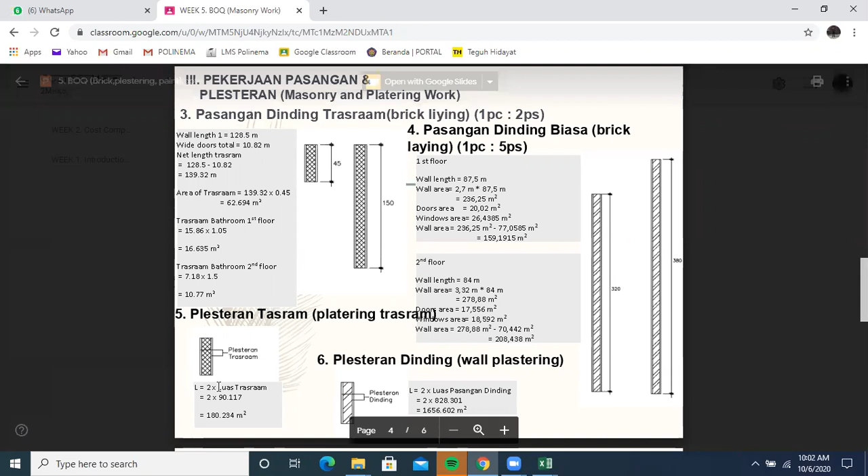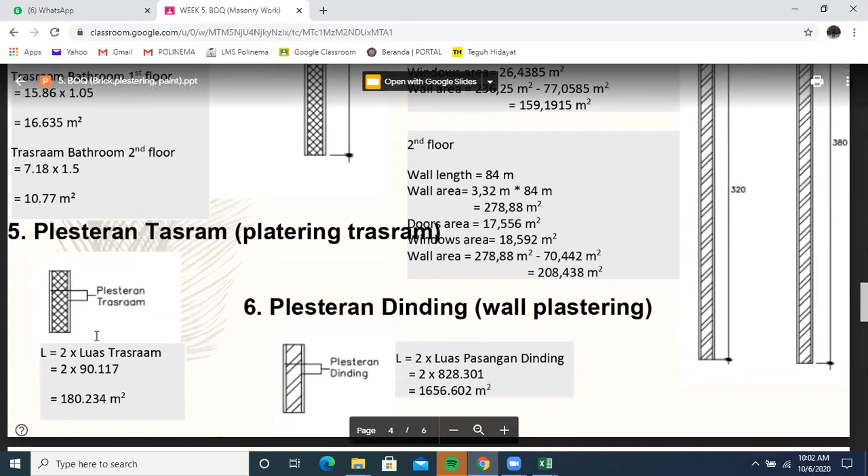Okay. After you get the number of the area for the trasram wall, you just have to multiply the area of the trasram by 2. Why should you multiply by 2? Because basically, if you take a look, the drawing of plastering is covering the flat surface of the wall between the right and left section in this section, right? So you just have to calculate the area of trasram multiplied by 2.

Okay. So after that kind of understanding, you just have to do the plastering. For example, I'm doing the plastering for... oh, I'm sorry. Okay, I will put another calculation. Okay, plastering for trasram. Sorry.

One PC compared with 3 sand. Okay, I get the number over here for bricklaying. Enter, and you just have to multiply by 2, and then you get the number, okay, like this, in square meters.

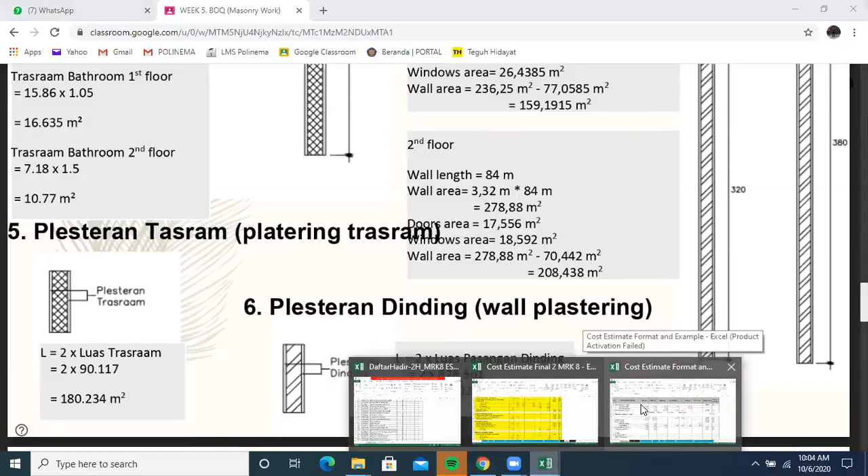Okay. You have to do the same thing for the normal plastering, the regular plaster. The composition is 1 compared with 6. So what you have to do, if you want to calculate the plastering, okay, I'm sorry if the Excel is so messy. Okay, I get number 4, plastering. Okay, 1 PC compared with, for example, 6 sand.

Okay, I just have to get the area from the bricklaying, the normal bricklaying over here. 191 square meters. And I do the same thing. I just multiply by 2. And I get the calculation of 383 square meters.

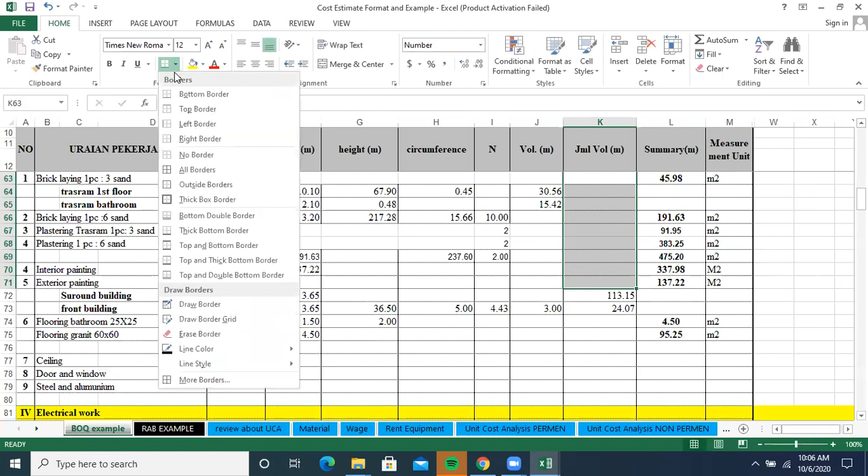Okay, after you calculate the area of the plastering, you also have to calculate the area for painting. Okay. For painting, basically the area is almost the same as the plastering. Now, interior painting. Okay. For interior painting, let me open the floor plan first.

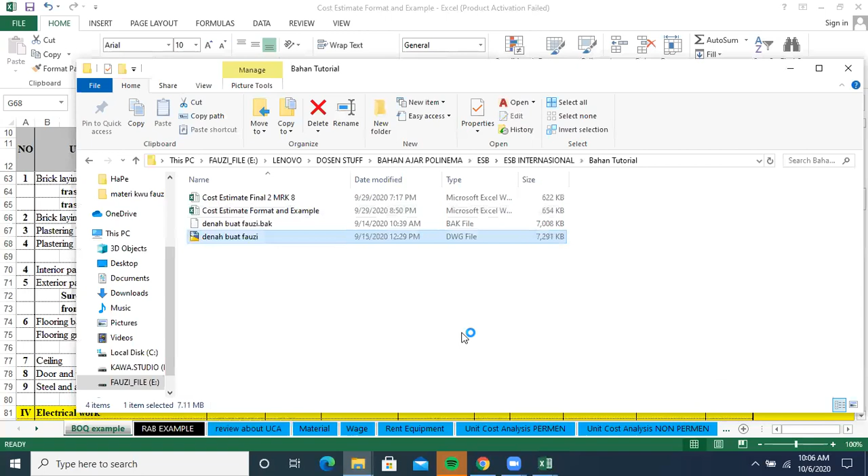Oh yes, if you have a problem with your drawing, you can share your problem in the Zoom meeting. Does anyone have a problem with their drawing? Yes, sir. I have a problem with my drawing. Okay, Abdul Rahman. Actually, in my drawing, I don't have a trasram. You don't have a trasram? Yes. Your drawing only has the normal wall, 1:6. Do you have the drawing on your laptop? Perhaps you can share it with us so we will understand the problem. Okay, let me open it. It will take some minutes.

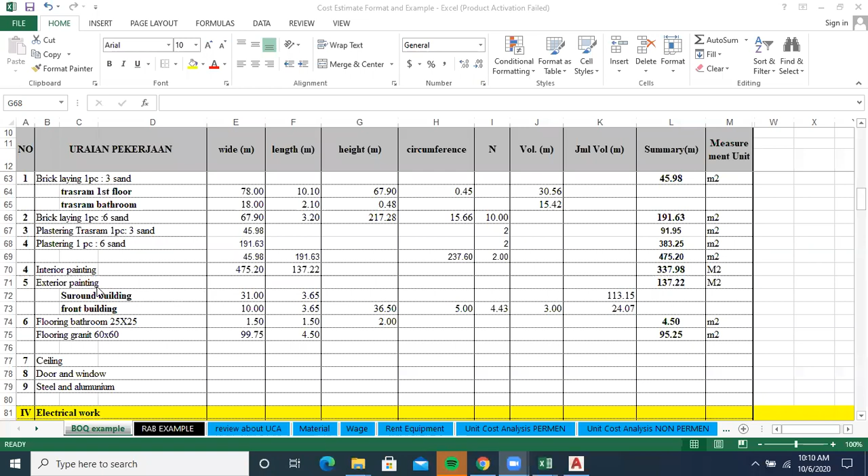Interior painting and exterior painting. Okay, basically what is the actual difference between interior painting and exterior painting? The interior paint material is used only for the rooms inside the building. But the difference is the exterior has a paint composition that is able to protect from the sun, sunlight. Okay, so you have to differentiate between the area of the interior painting and the exterior painting.

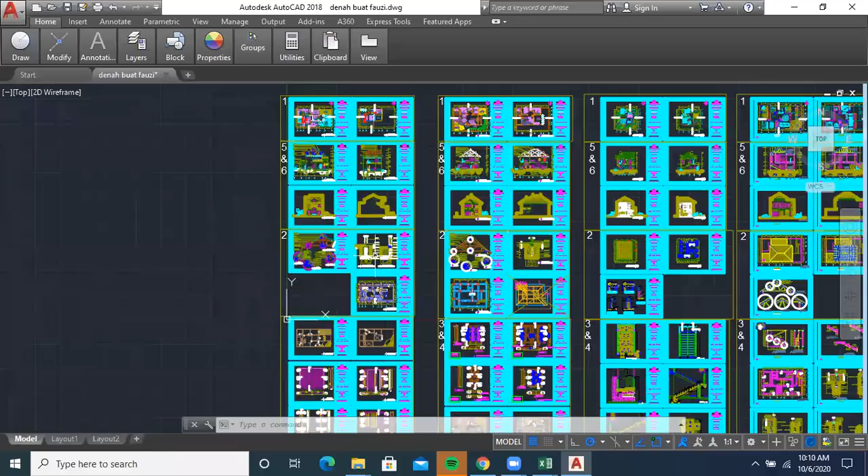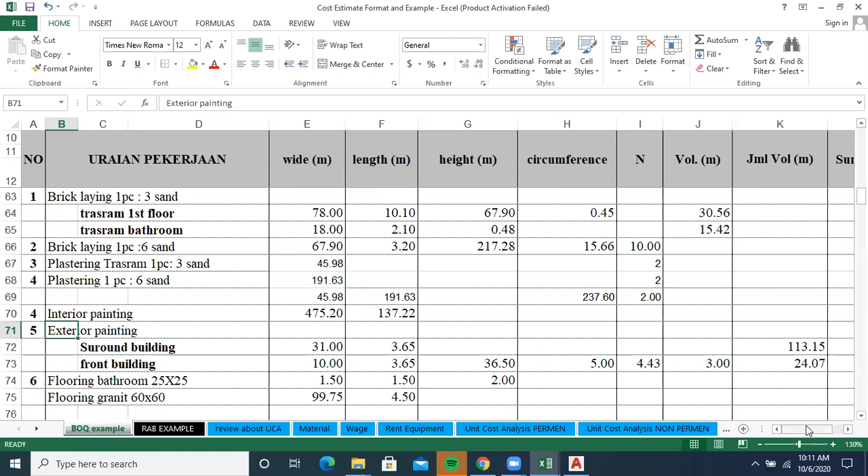The first thing you have to do to calculate the area of the wall painting is analyze. Okay, the easiest way to calculate the area for painting: you just have to take the plastering area. Okay, for example, over here. In my plastering calculation, I already have the whole area covering my wall. So in the end, the area that you have to paint should be the same as the area of the plastering. Is that clear?

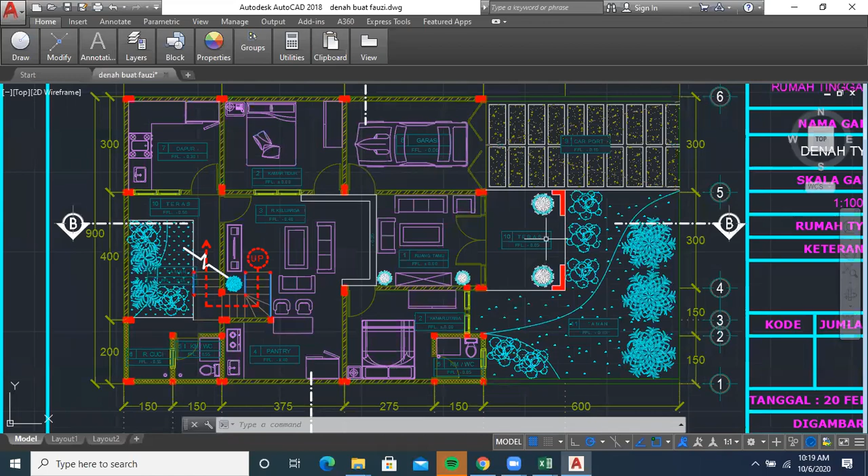After you calculate the area of the brick, you have to calculate the area of this door and this window. So how do you get those numbers?

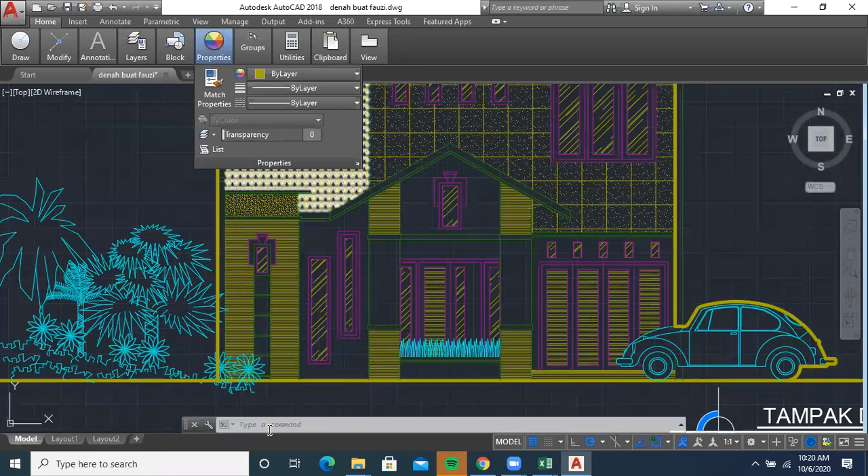First, take a look at this drawing, the front of the house. Based on this drawing, I have to reduce the area for my painting by the area of the door over here, and the ventilation over here, and the door over here, the window over here, and also this window. Now the question is how we get the area of those doors and windows.

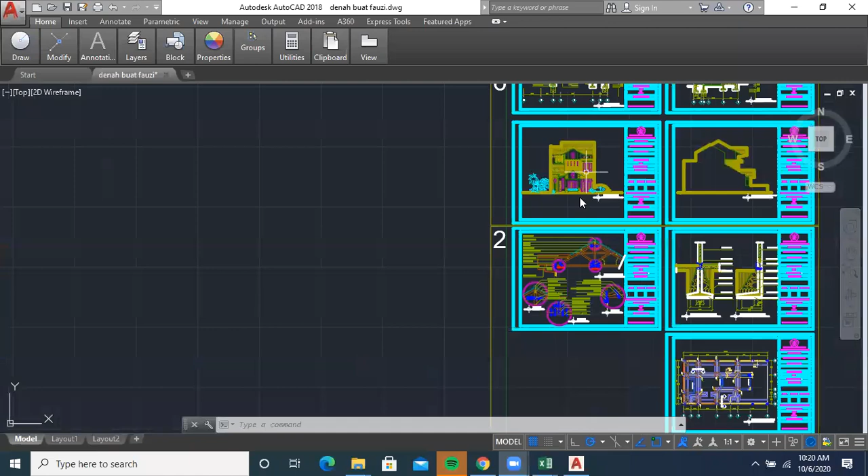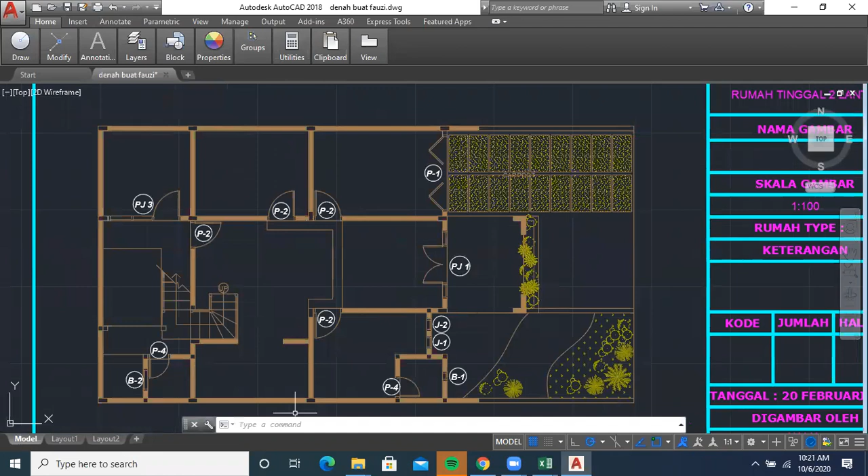You can look at the drawing from the plan, especially the plan for the door. I get the drawing - this is the plan of the door frame, the window. I get the notation: P1, PJ1, J2, J1, and B1.

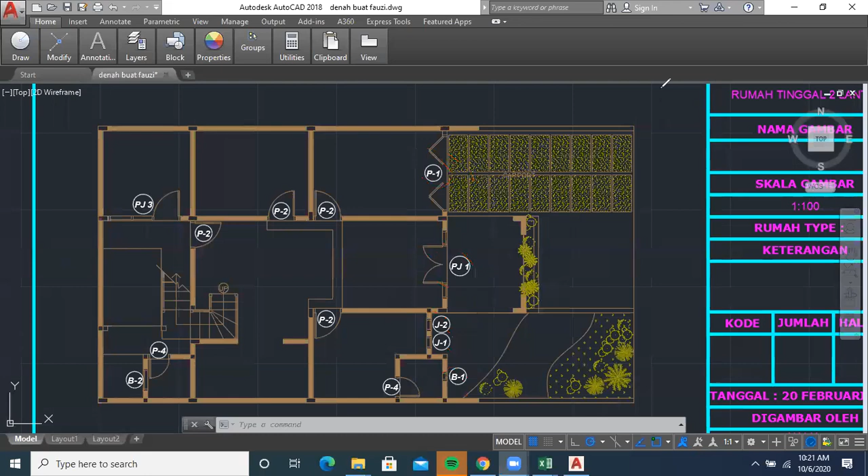All of them, the quantity is 1. PJ1 is 1, J2 is 1, J1 is 1, P1 is 1. After you understand that, you have to find the area of this part - you go directly to the detail drawing of P1, for example. P1 over here, I get the detail of P1.

If I look at this detailed drawing, I get the information that the width of the door is 2.4, increasing with 6 and 6. Let's assume 2.5, to make it easy.

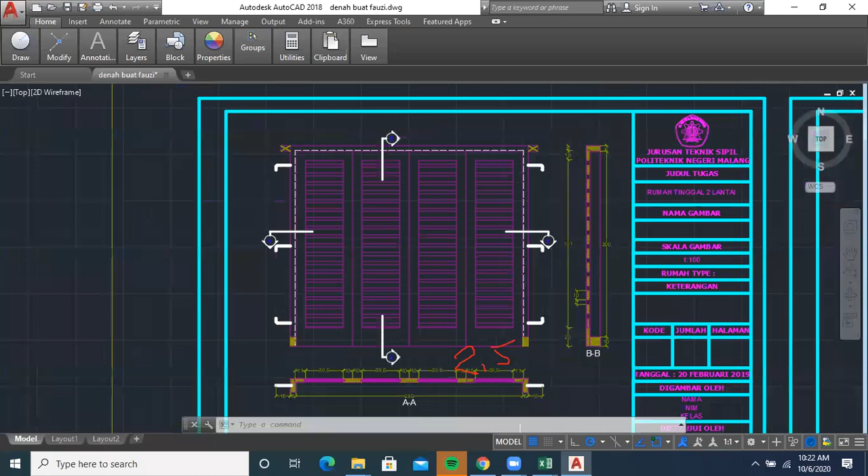And the height of this drawing, if you look, the height of the door is 2 meters, with an additional 6. Let's assume 2 meters to make the calculation easy. So you have to multiply the area: 2.5 with 2 meters, and we get the area of the first door.

Is that clear? Any question before that?

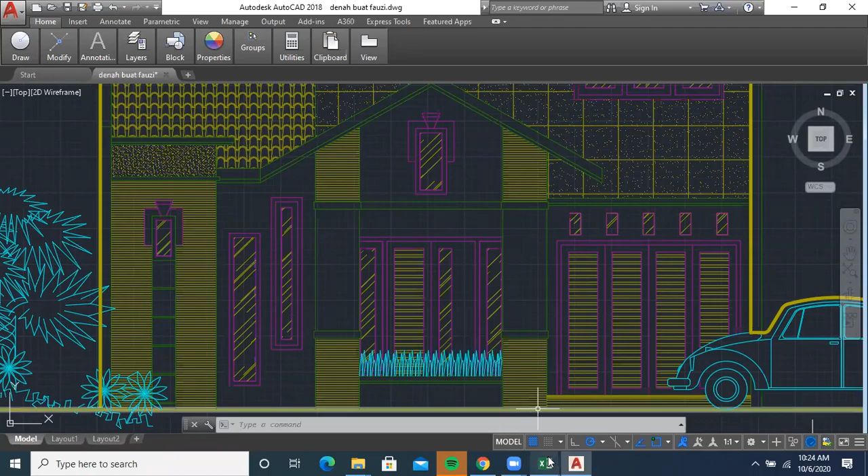Okay, I get 5 square meters for the first door, and for the second one I will calculate with this kind of information. Now let's calculate how I get this number.

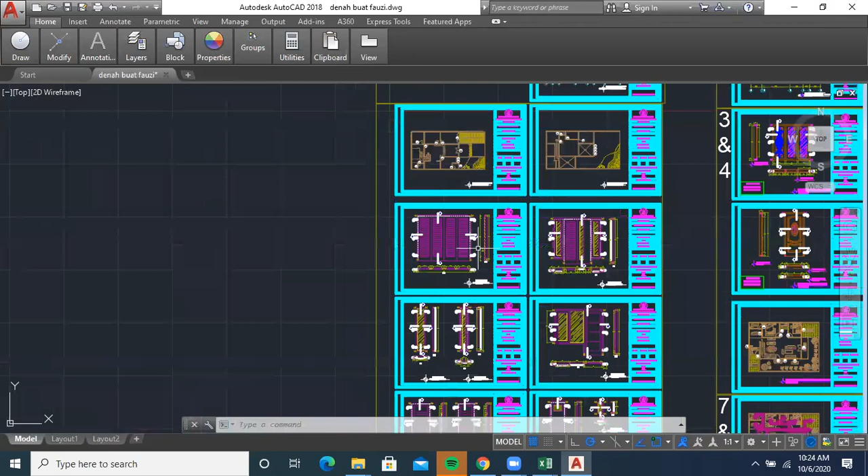Okay, in PJ1, I already have the information that the area of the door - this is the... okay, now how to calculate the area of this door? It's very simple, you just have to get the area. For example, I get the area over here.

Okay, I get the area of this drawing. How long actually is this drawing? The height is 160, and the width...

120 plus 15, let's say 50 for this one, and this is 50 also, let's assume it is 50. So I get 50 plus 50, 1 meter, plus 1.2, giving 2.2 meters and 1.6 meters.

Then add it with the height here. For example it is 20 centimeters, derived from 0.2 here. And I get the width from 120 plus 6 plus 6, or plus 5, so 130, which is 1.3.

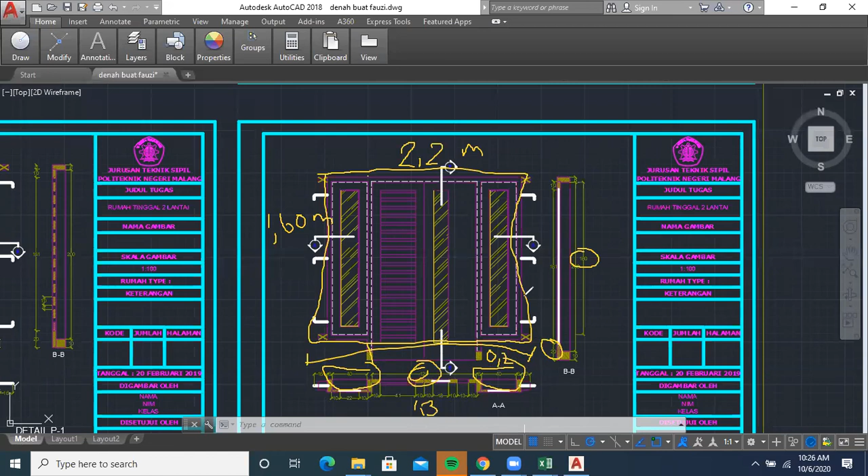So how do you do it? Over here, you just have to multiply 2.2 with 1.6. You get the number. Then you multiply over here 0.2 multiplied with 1.3.

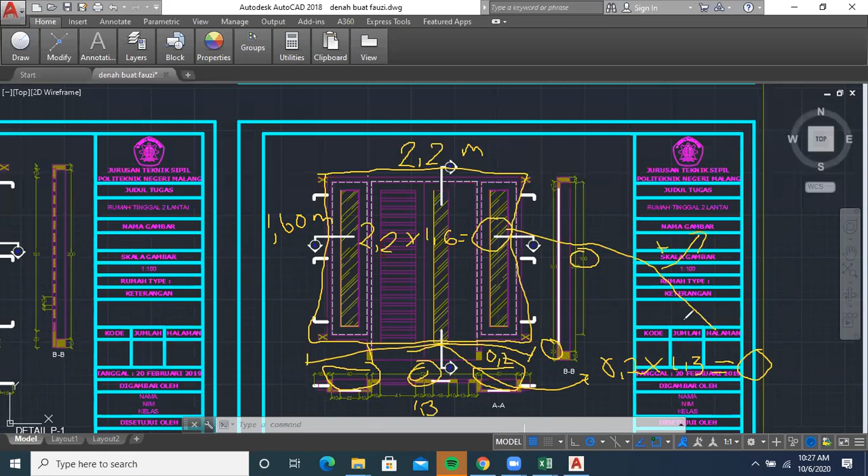After you get this number, the result, you have to add the two results together. Now, in my calculation...

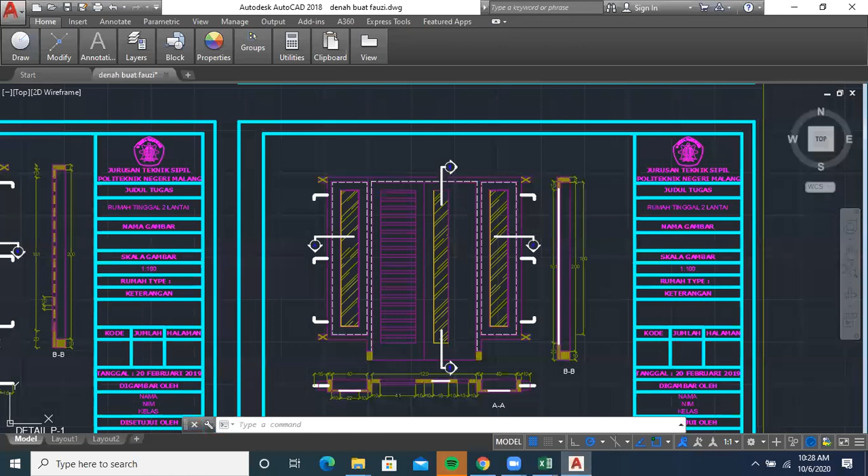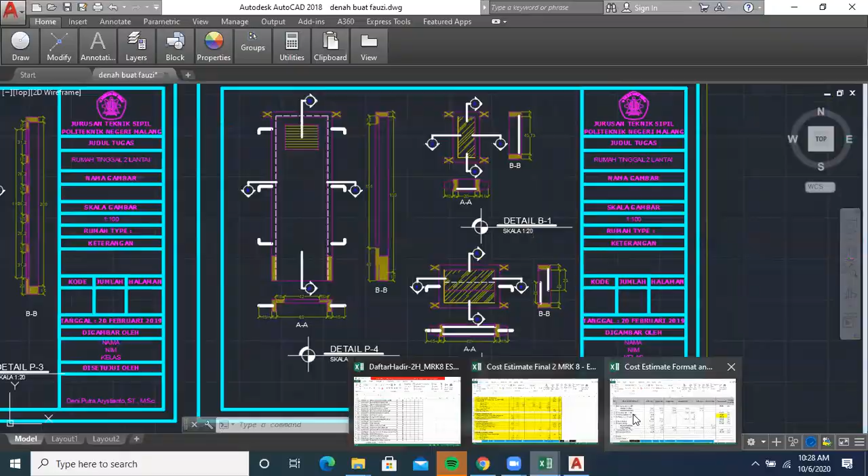Okay, I do the same way for all the drawings, especially for J2, J1, and B1. I have to calculate this, and this, and I have to calculate B2 over here. In the end, the area will be - I have to reduce the area of the front...